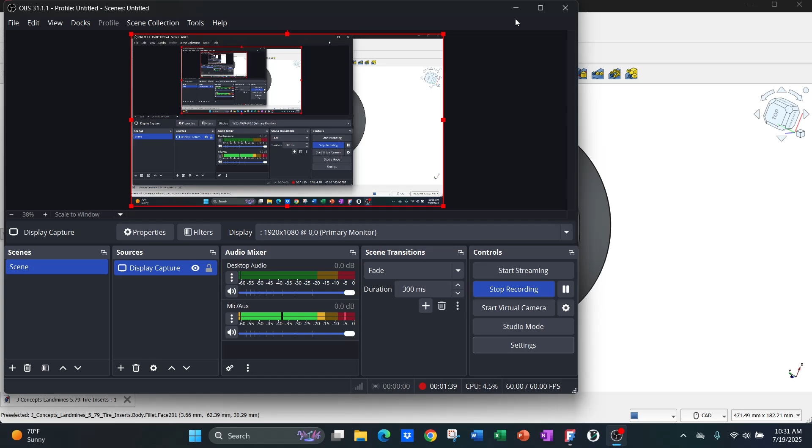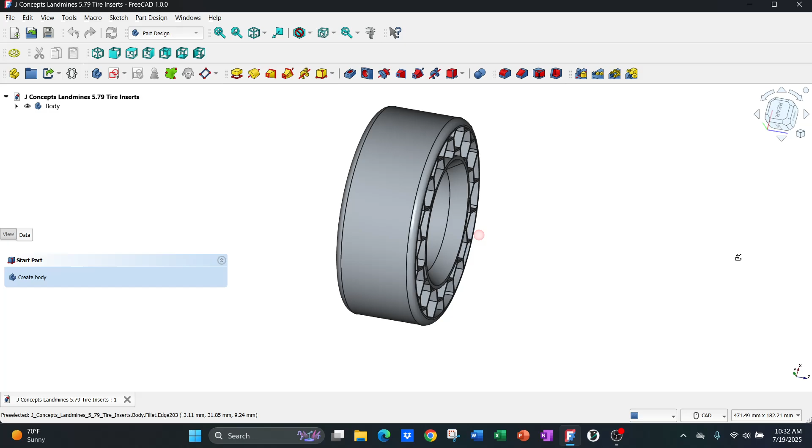So let me get on here. This is what we're looking at, just a simple design. FreeCAD's pretty easy to use. Right here, you just kind of click with the scroll wheel, and then you left click with your index finger on that part of the mouse, and you could just drag it like that, and you can kind of get a little bit of a roundabout view.

This isn't like a tutorial on how to use FreeCAD completely. If you wanted to, there's so many guys on here that I learned from. So this is just the step by steps on what I'm going to do to get you where this is.

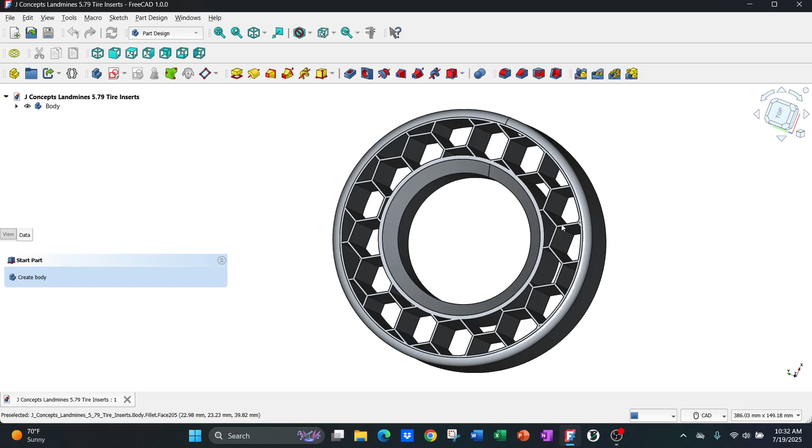So, yeah, the wheels I'm using are by RC Lions. If you went to tools here, went to measure, you can click right there and you can click there. And we're at 29.52 millimeters wide on that inner diameter part where the brass ring would be for the RC Lions. So I'll show you guys how to get this chamfer and down to this width right here.

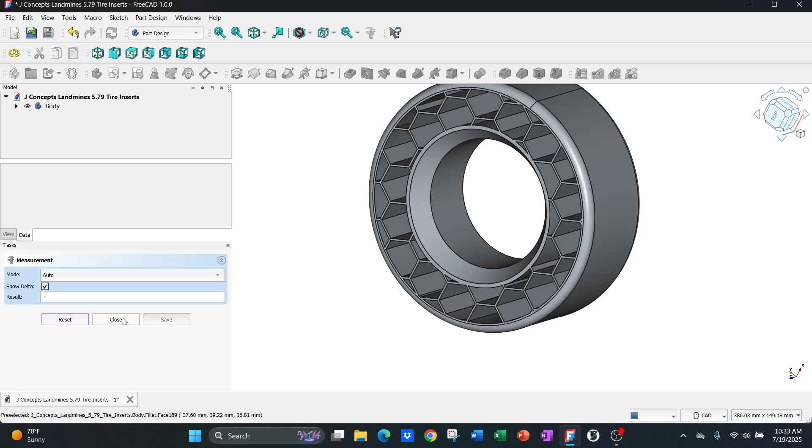I've come a long way with this, but I'm still such a noob. But this is the technique that I did to get me this. So I'm gonna just open up a new document. I got it in here.

If you go to the macros, or where is it, or the tools, the add-on manager, you can add on this honeycomb feature, which will kind of auto generate a honeycomb pattern. So that's what we're going to do here.

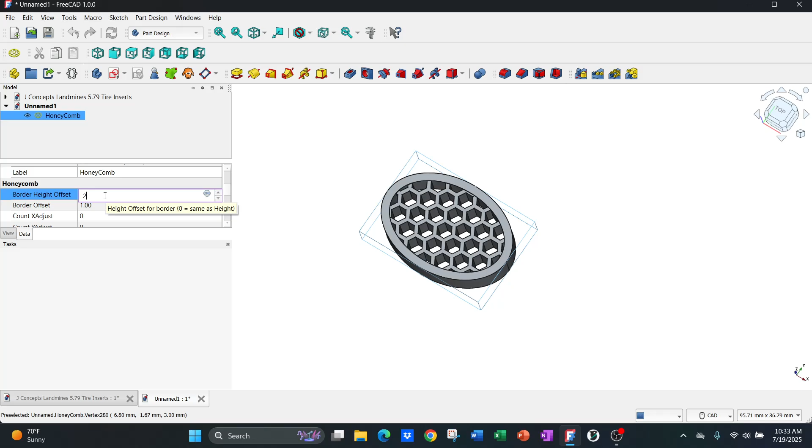I'm going to click honeycomb, and it throws up this little object. When you come over here, you can kind of see your parameters. So border height offset, just to show you what that is - you see that? We don't want that. So I'm going to put that at 0. Click right there. Bam. Now it's dead flat.

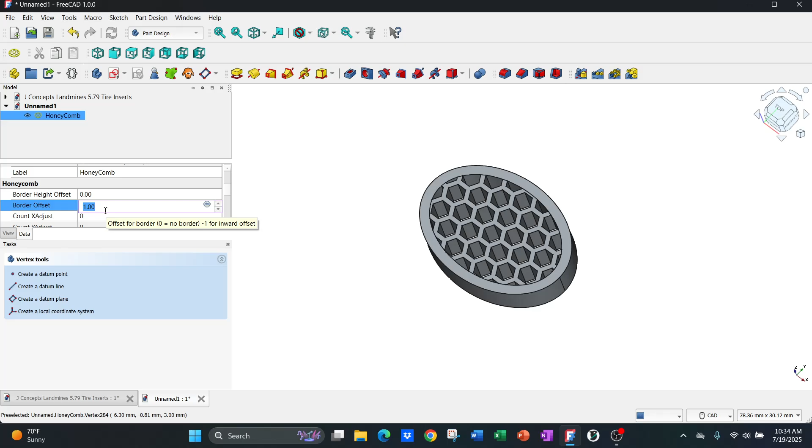Border offset, I'm not gonna leave at 1, I'm gonna change this to 5 millimeters. Oh my god, look at that. Height, I changed to 48 millimeters. It's gonna explode now and go that way.

Okay, length, this is very interesting. So when you're changing the length and the width, I wanted to change it just so you could see what's going on here. It takes a while to generate. See that change? What I did here is I think it was 115 millimeters. Watch what happens, it's going to take a little second to generate. It's kind of freezing up just a little bit, but it'll clear up real quick here.

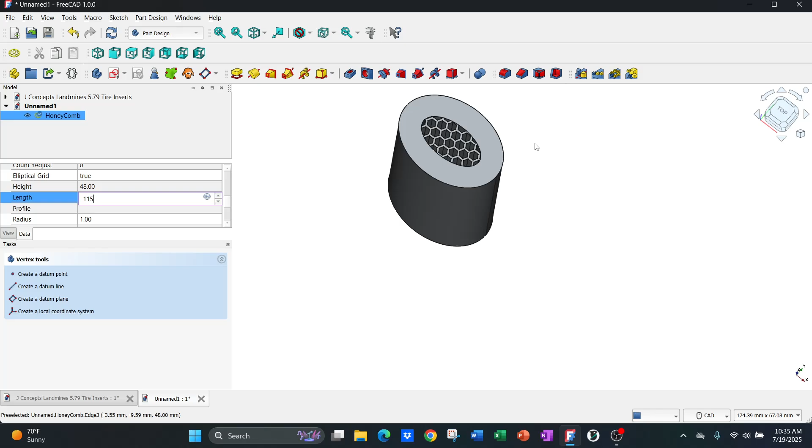Just give this thing a second. Basically, it's just computing. Now look at that.

Next thing I'm going to do is go to the width, and I'm going to set it at 115. It's going to take a while to generate because it's creating such tiny little honeycombs. I'll show you how to change the shape or size of those honeycombs in a second. Hopefully this computer doesn't freeze while doing the screen recording and this, but it should be okay. We'll see. It's not a very special computer.

I'm literally working on an Acer Aspire 315. It's got the AMD Radeon graphics with a Ryzen 7000 Series 5 graphics card. This thing's getting it done for me. It was a Costco special, like 400 and something bucks. I'm not a laptop guy, I just needed something new to actually keep up with what I'm doing.

This thing's not responding. I don't know if you guys can see that, it's freezing up a little bit. I kind of screwed up. What I should have done is change the size of the honeycombs first, the radius at least, and the separation, and then I wouldn't be dealing with this freezing problem. So I may have to restart FreeCAD and start all over. Hopefully you guys stay patient with me, we'll get there. My computer's just kind of freezing up.

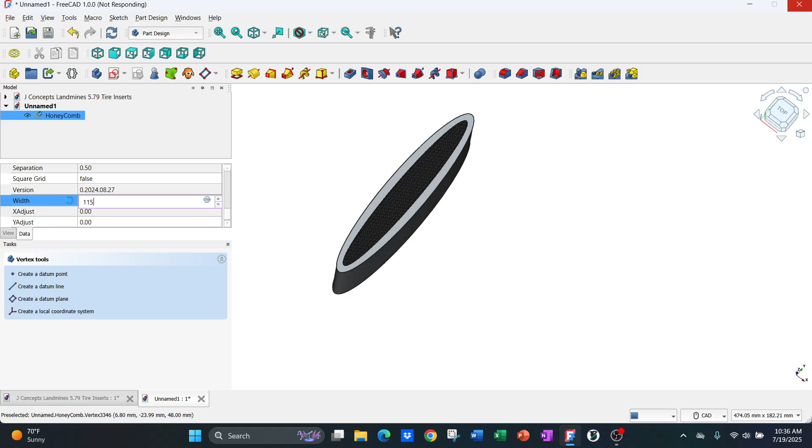Yeah, you know what? Oh boy. Come on, just respond, just get going.

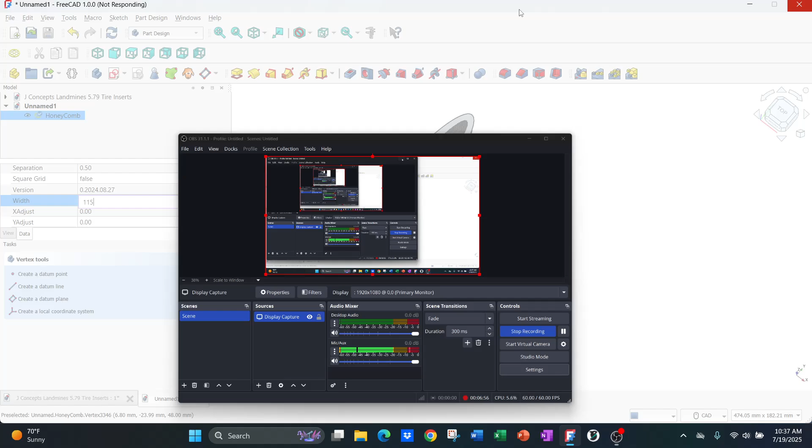Well guys, where are we at right now? Oh, we're already 6 minutes in and I'm goofing up. Let's close the program. Let's close the program. All right, that happens. Let's just start new.

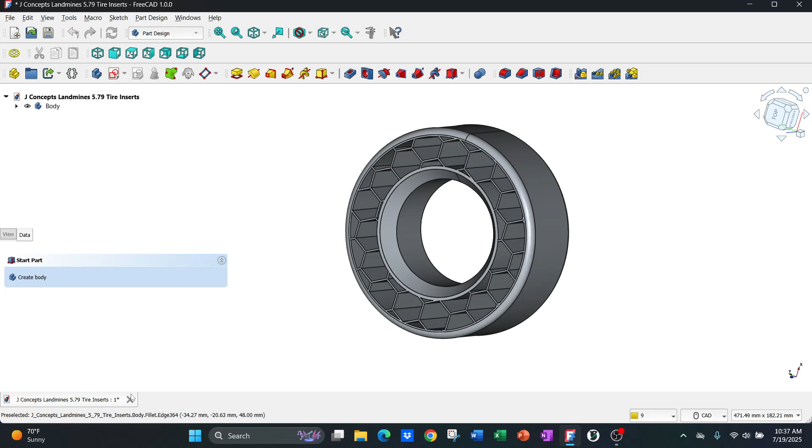Don't worry, I'll get us going where we were. I could try and recover it. Okay, recovered that one, great. That's not what I wanted. I'm gonna close mine and let's start new.

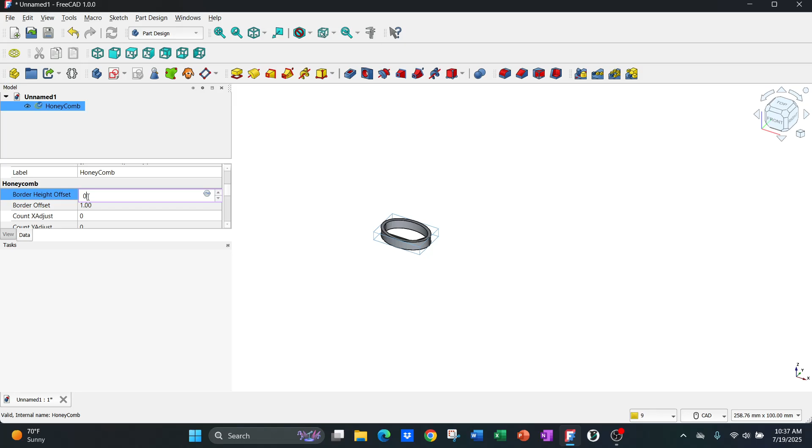Okay, honeycomb. I'm gonna change the radius of these to 10. There we go, so there's nothing in there. Change that border height offset to 0 again, change this to 5 millimeters. Height at 115. Or no, wait, height, excuse me, sorry, I'm a noob. I've never done a screen recording and tried to do what I'm doing right now.

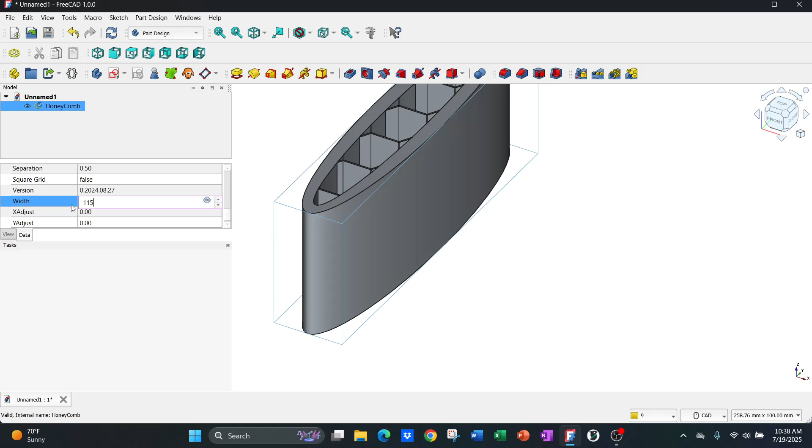So look, now it's going. Now it's going good. So I glitched out the computer.

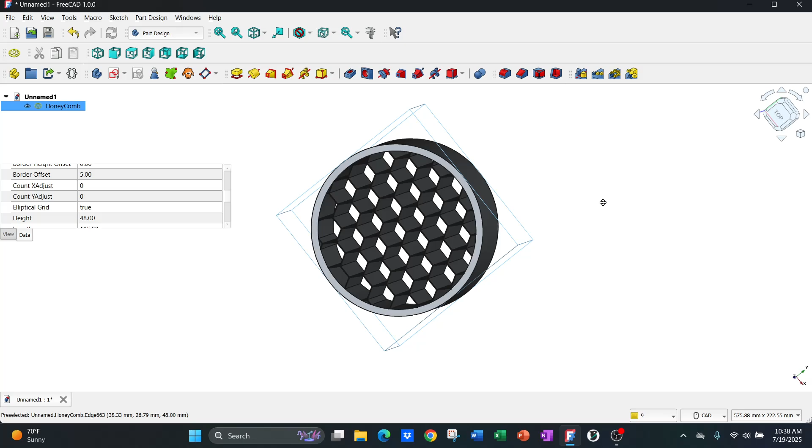So we're going to come up with a shape like this to start, okay? Which is 0 border height offset, border offset of 5 millimeters. That's this distance right here. Height of 48 - the height is the thickness of it because I was measuring the foam, and I think it was like 50 something, 52 millimeters for the J Concepts landmines. I wanted it a little bit smaller so it's not such a tight squeeze in here for the TPU and it doesn't get crushed. And 115 and 115, radius of 10 for the honeycombs.

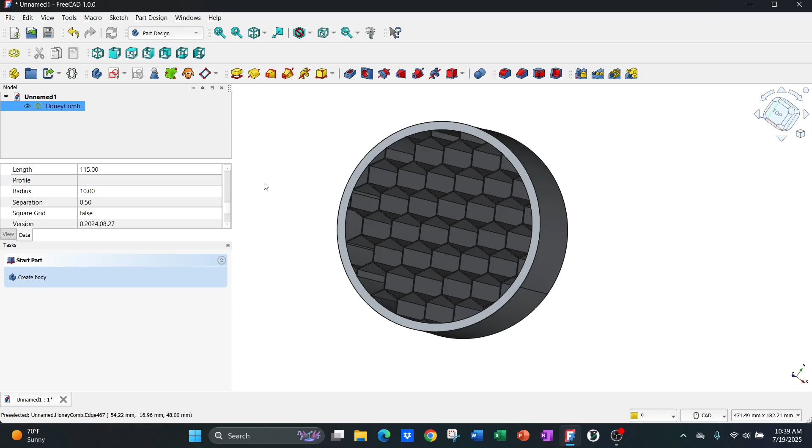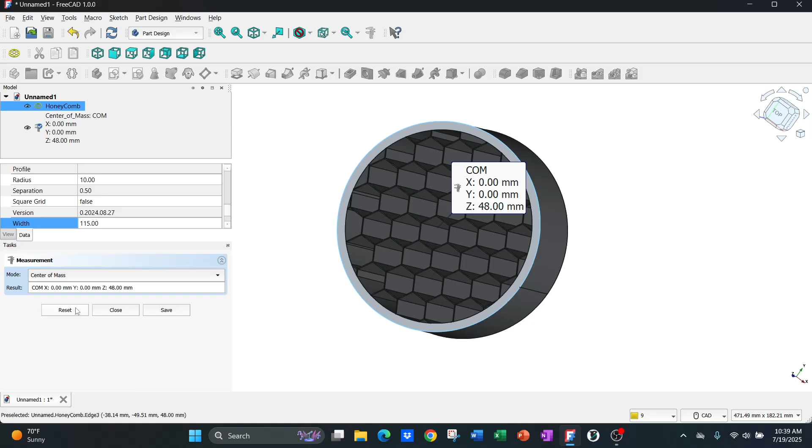Okay, so let's get off there and I'm just gonna measure - which is not center of mass. Let's do radius. It's not working for me, guys. Okay, I'll do that later. We'll use that little measuring tool, but you're gonna get something like this.

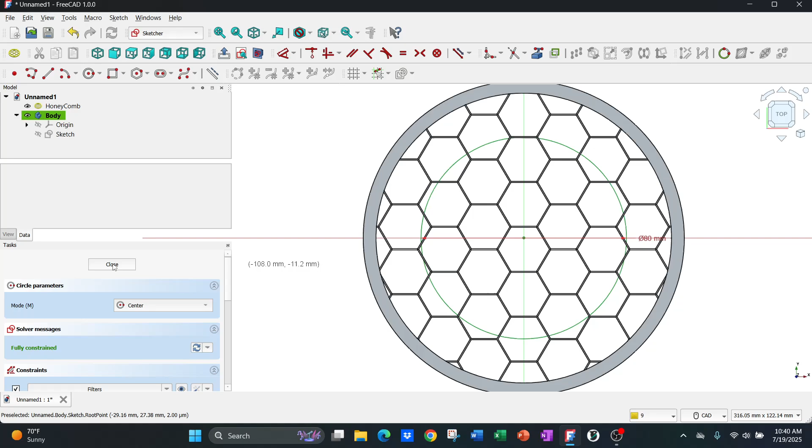I'm gonna create a new sketch on the XY plane, and I'm gonna do an 80 millimeter circle. So I clicked on that center point and 80 millimeters, done. Fully constrained, done. I'm gonna pad it - not 10 millimeters, I'm gonna do 48.

That's right in there, right? It's right in there. It's the same thickness as what the honeycomb was.

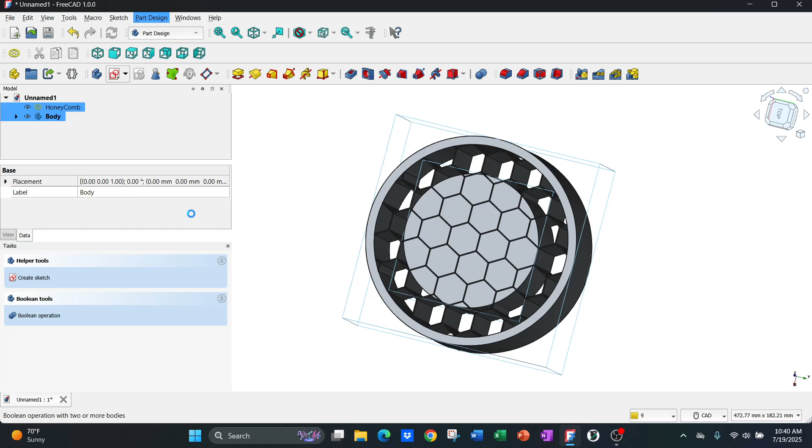So at this point I'm going to do a Boolean operation - how do you say that frickin' thing - Boolean operation. I'm going to click that, I'm going to do Boolean operation, and it's going to put those two together. Now this is all one piece, okay?

And you could still go back and edit the diameter of this face right here. So I'm going to click that, I'm going to add a sketch, okay? And if this is a little fast for people, I apologize - just slow it down. It probably won't be.

This diameter was right at 64 millimeters for the outside diameter for the brass rings, or the rings that come on the beadlocks of the RC Lions. Again, you could tailor this to all your dimensions with whatever wheel and tire combo you got.

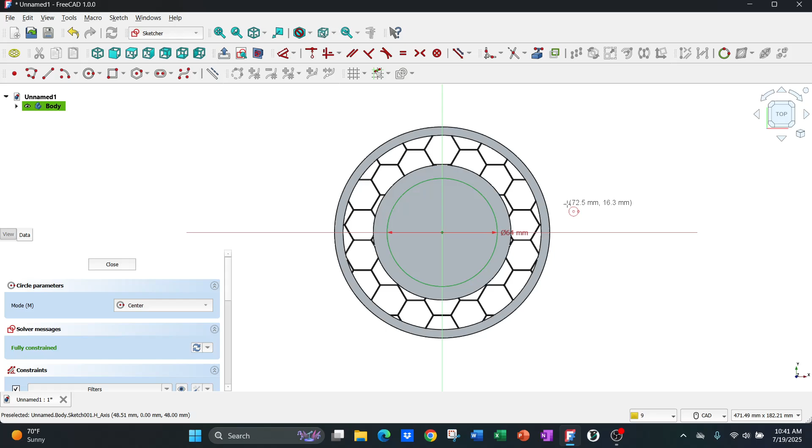Okay, so it's fully constrained. Now I'm going to pocket this. Okay, and I'm going to do dimension through all. That went through all. Press OK.

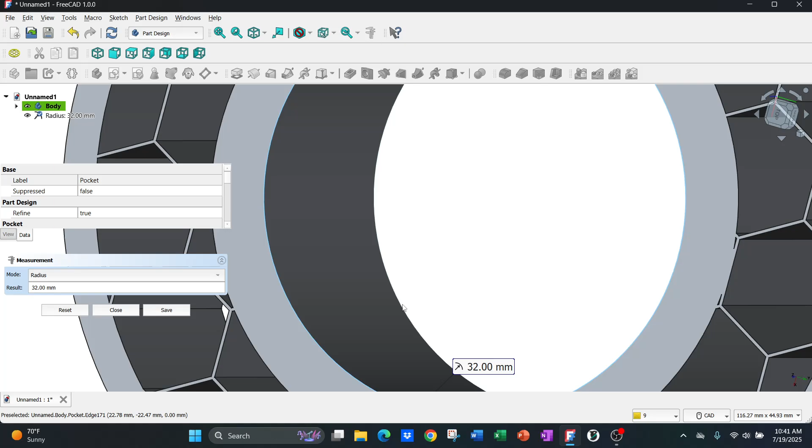All right, now we're at a point where that distance isn't right. This distance from here to there is 32 millimeters. So we want, I think it's 28 millimeters or 27.8. I'm going to get it to 28 millimeters.

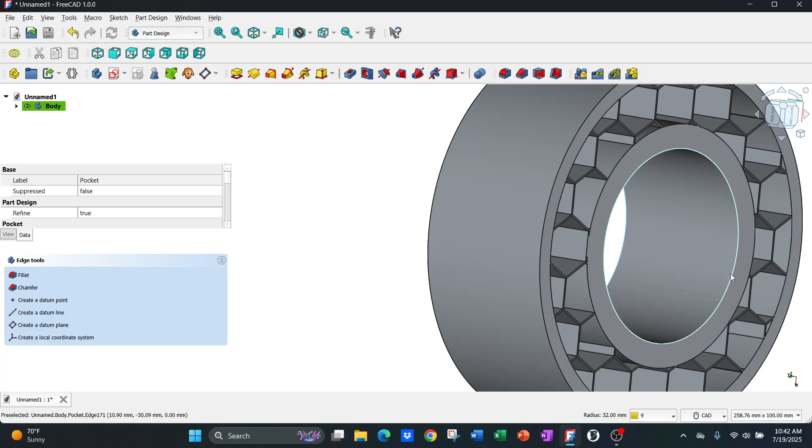So select that edge, whip it around here, control select that edge. And then from here, choose the chamfer option right there. Don't set it on equal distance, do distance and angle.

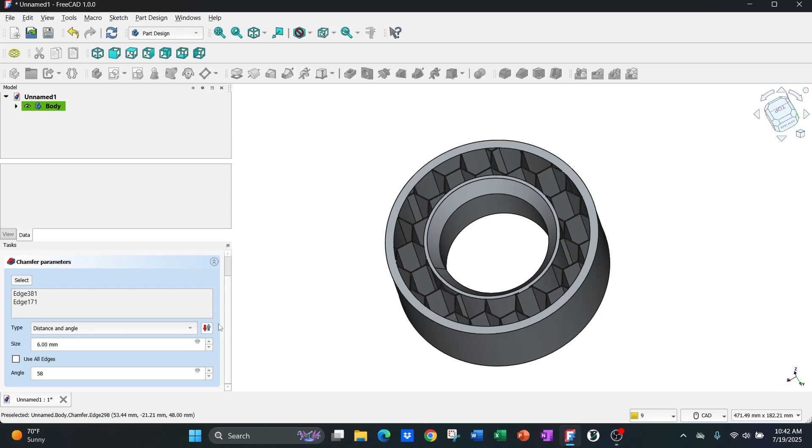I'll increase the distance or the size. We'll do it to 6. Then I'm going to change this to, I think it was 58 or 57, one of the two. We'll do 58 to start. Press OK, all right, get back there.

You see how it chamfered both edges? And now this distance might be where we need to be. 28.8, perfect. So I'll have 0.8 millimeters extra of material of TPU for that ring to sit right in there.

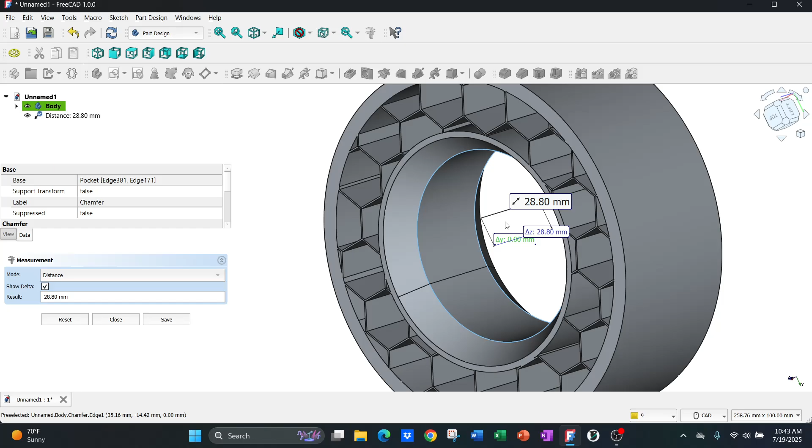Once we get to that point, I'm going to select that edge, and I'm going to use the fillet tool, which I'm going to do this down to, let's try 4. You know, if you really wanted to get nifty, you could even do 4.25. What's that look like? Right there.

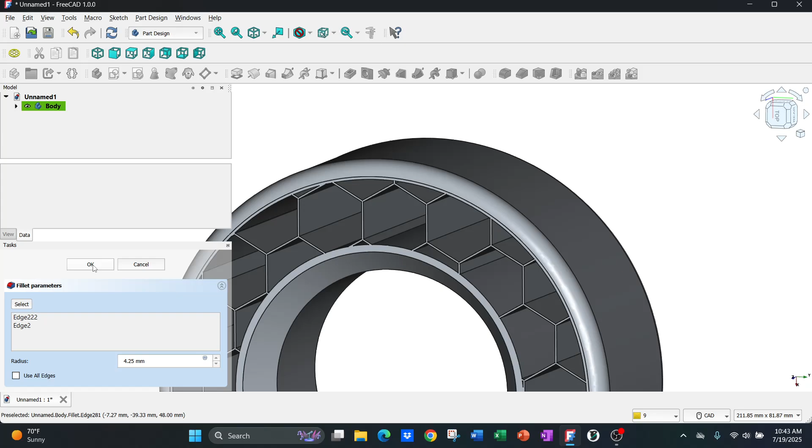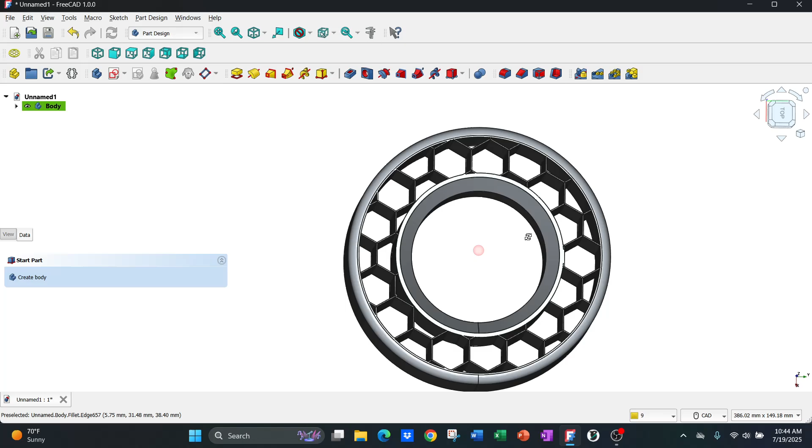So there you have it, that is essentially what we need. You could change the radius of those honeycombs, and you could do all sorts of shapes in a 3D printed design for an insert like this. I just used a honeycomb add-on manager tool to kind of speed up the process of creating the shape and the design, and I like what I get so far.

Oh, you know what? That's one thing we could change that I didn't change. Go back to your Boolean, click on honeycomb. Separation, I want at 1 millimeter. Watch what happens here. You see the thickness in between the honeycombs change? So there you have it.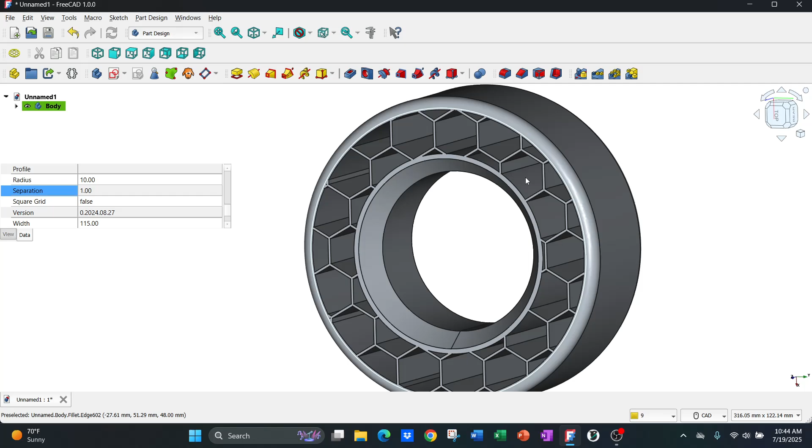That is essentially what I'm going to run right there. I haven't decided on exact radius of the honeycombs. I'm thinking 10 millimeters is a good place to start. And then I was trying to show you guys clicking on that. It's just not giving it to me.

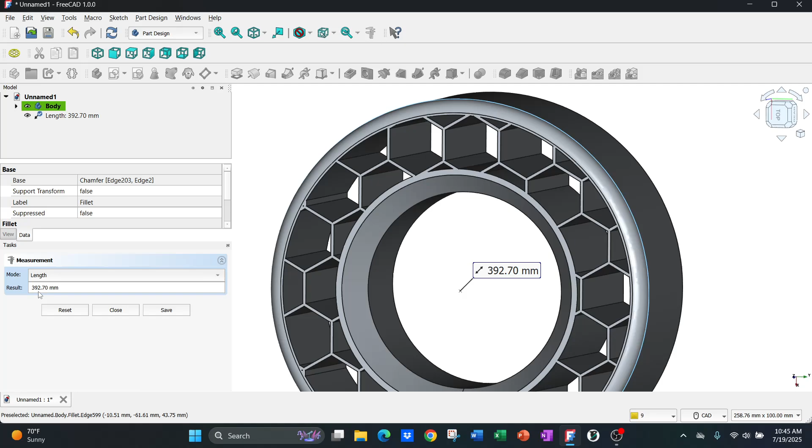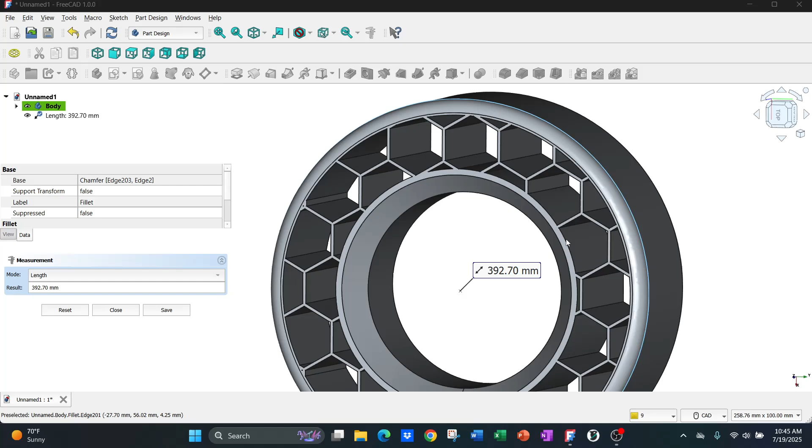392.7 millimeters in circumference. So because I'm dumb, okay, I just went to a circumference to diameter calculator because I don't want to mess around with it. And we were 392.7, 392.7, and that's 125 millimeter diameter. That's perfect, that's literally exactly what I wanted with the size of the outside diameter, or yeah, diameter of the whole insert.

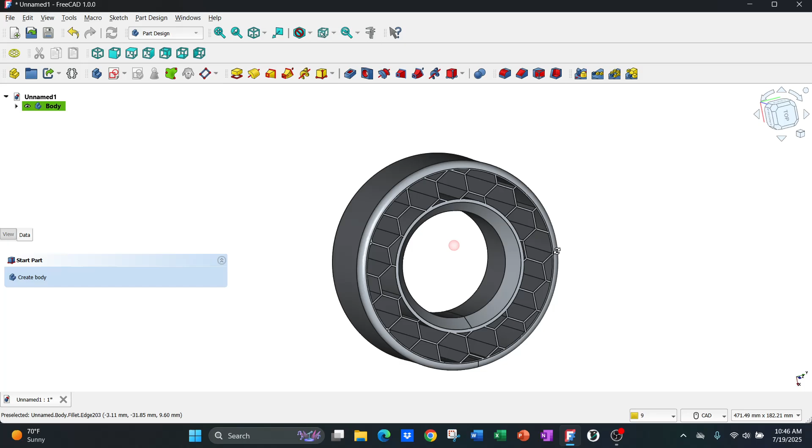So there you have it, that's pretty much me showing you my design. I think it's a good design. The honeycomb shapes really seem to conform to the rocks properly. And truly, I'm not going to change my 4.75 TUS inserts at all. They're perfect with the 85A shore rating Siraya Tech TPU.

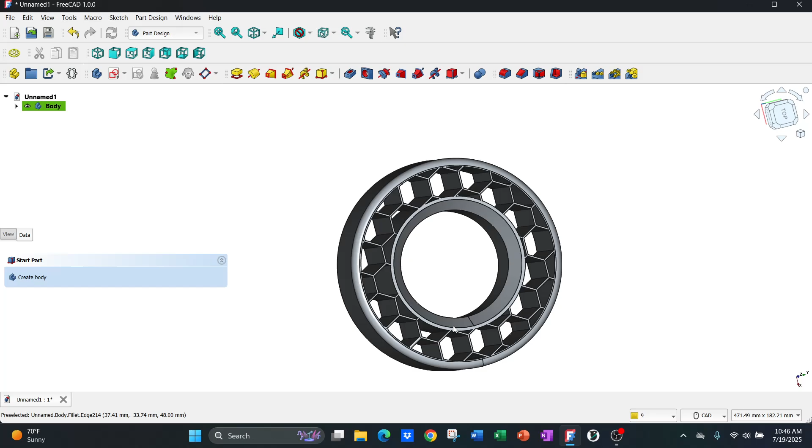Now it is a little bit of a challenge to print TPU. This insert right here for a big old, I mean that's a big old insert. It's probably going to be like a 10-hour print job for just one. So be prepared, if you're going to print TPU, you have to print really slow. You need to hang that filament above the direct drive extruder. If you don't have a 3D printer with a direct drive extruder, it's just not going to work. I don't want you to waste your time and get super pissed off like I did.

I just want you to have some success if you're trying to tackle this. It's all about dry filament, print speed, volumetric parameter being correct. Know how to print the stuff. So yeah, hopefully this was

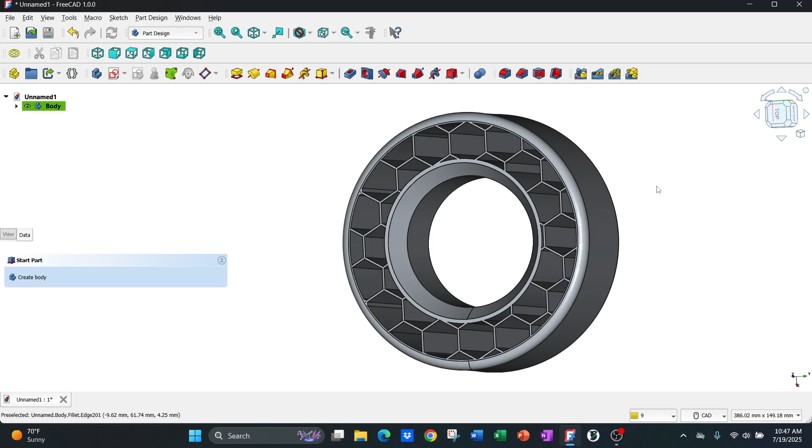an informational, intuitive kind of instructional video. I'm sure on the channel you're gonna see a 3D printed version of this for the landmines and me mount them up and everything in the class 3 build that I'm working on. So yeah, this was me trying out screen recording. I really hope it worked out perfect. And you could do any design you guys want. That's just me showing you a quick, easy way with FreeCAD.

When it says free, it literally means free. Is FreeCAD kind of buggy? Yeah, it is, but it's totally working for me so far. There's tons of tutorial videos on YouTube, and hopefully this will be one that will help somebody out someday.